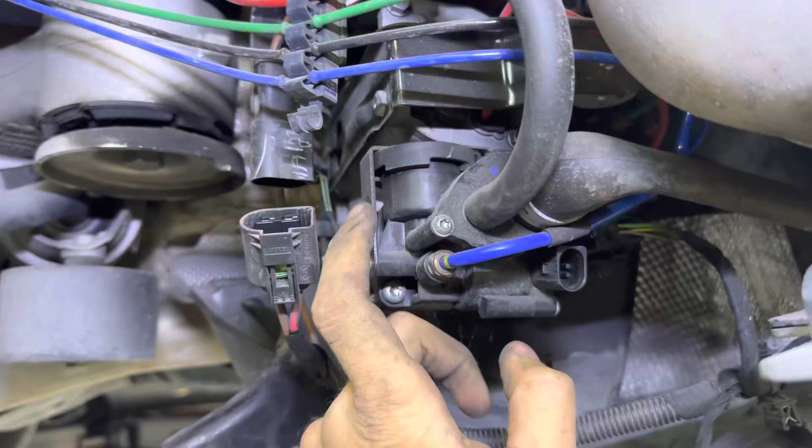The connectors, there's 1, 2 here, and then the third one is right there. And there's all your lines, by the way. Make sure you take a picture to know how they go.

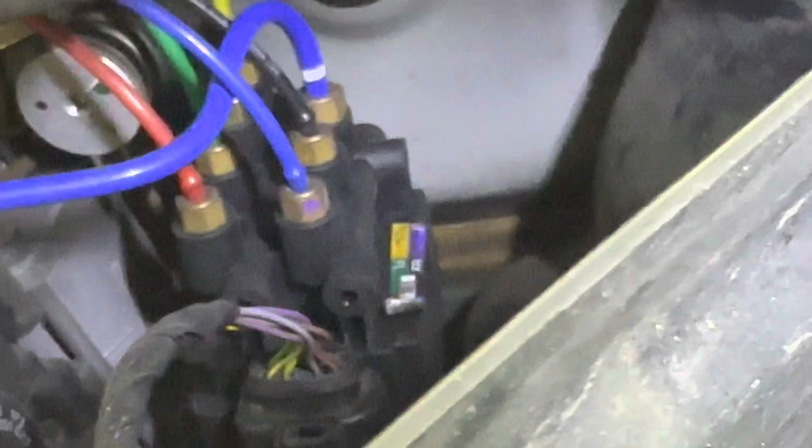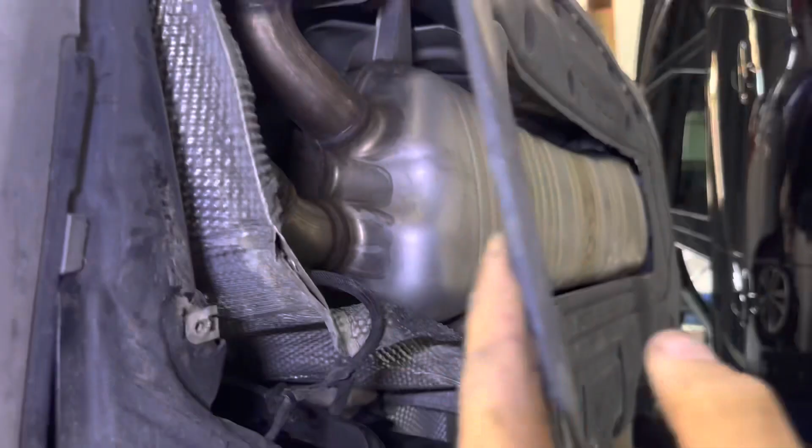Okay, so go ahead and take off the wheel first. You're gonna need a 17 millimeter, and then get a 10 millimeter and an 8 millimeter. You can take off the fasteners here. Don't worry about any of that. You're gonna remove this right here. There's gonna be a bunch of bolts. You don't have to remove this. You don't have to remove the muffler like they say in the instructions. This comes off, just loosen it.

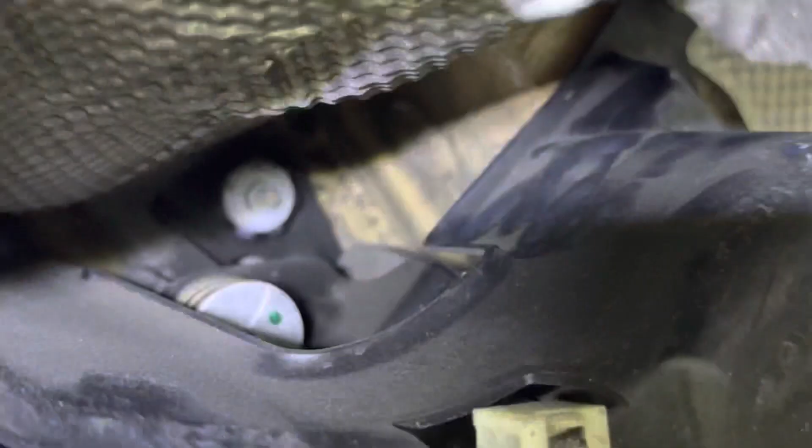And there's gonna be 1 bolt right there. And then 1 bolt right here. And 1 bolt right here. Okay, so you're gonna be able to access it like this. Just bend this out of the way to access this. There's gonna be a connector here.

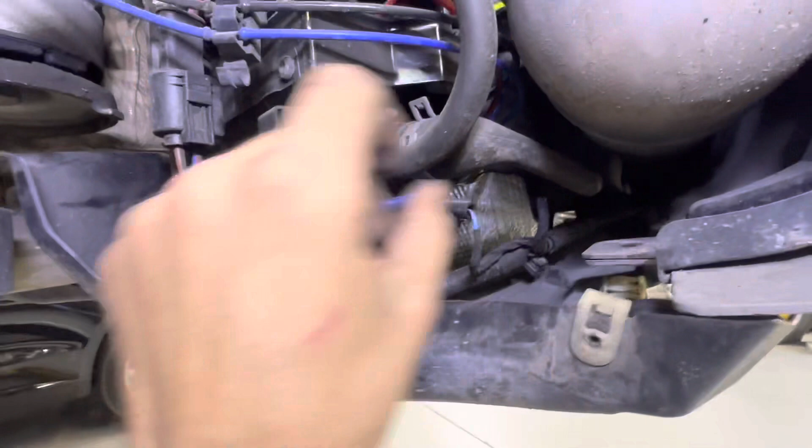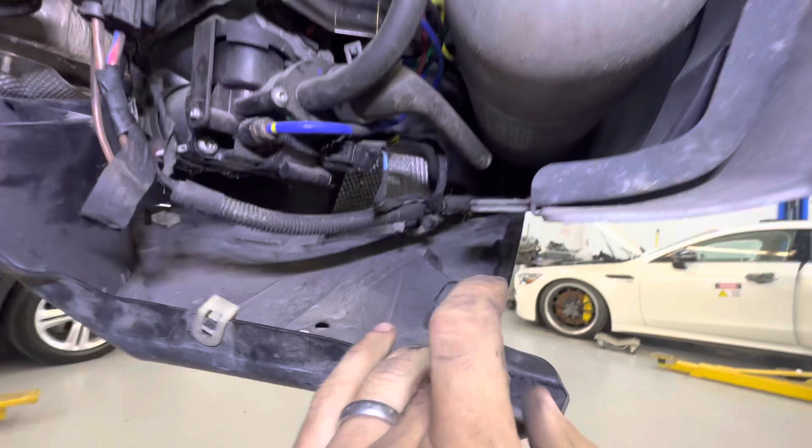Airlines, you're gonna release right there. You see at the valve block. It's all one assembly. I'll show you. Here's your air tank. There's gonna be also 1 connector right here. Make sure you take a picture so that you know where everything goes. And unclip this wiring harness right here from right there. And yeah, pretty straightforward. I'll show you in a second.

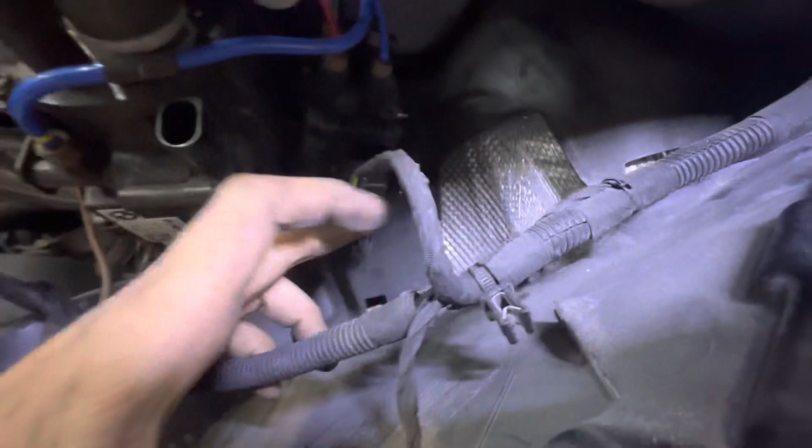There's also 1 connector there, so there's a total of 4 connectors. 1, 2, which goes there. 3, which goes there. And then 4, which goes there.

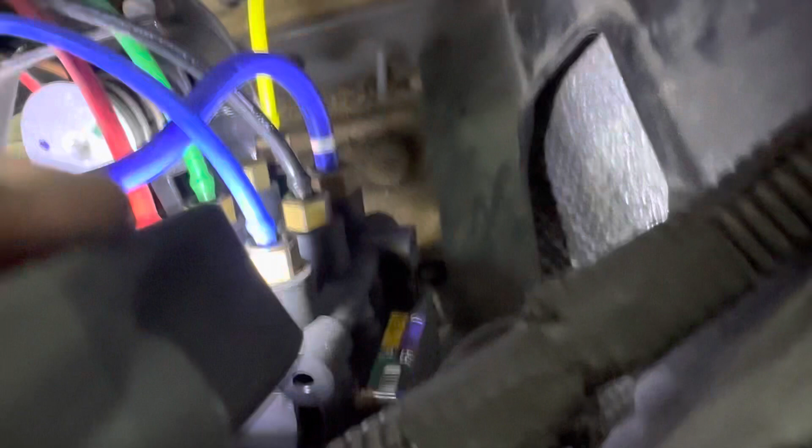So next, you're gonna remove that yellow line that goes to the compressor fitting. Remove it and let it drain. Hear that hissing? And then start slowly loosening all these as well.

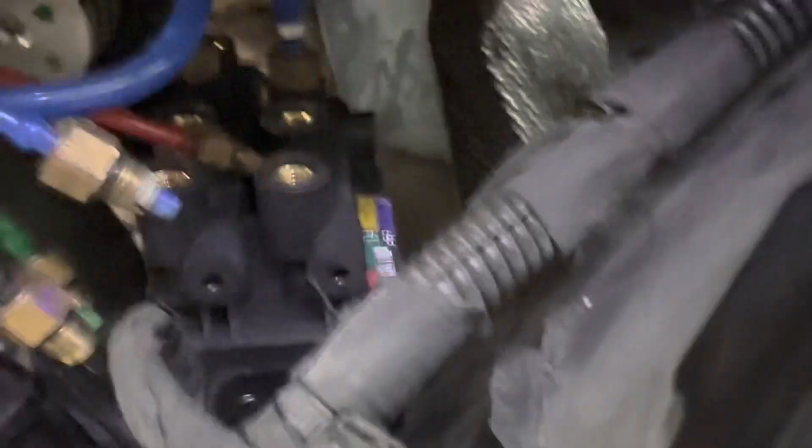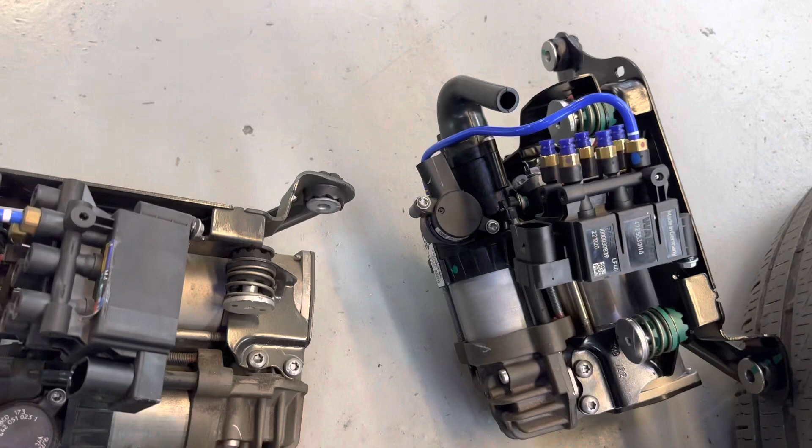So here we can see the 2 compressors side by side. As you can see, you get all new caps for the new one. Very easy, you just got to take off the old ones from the airlines. Everything comes with a new valve block. You're gonna have to reuse your bolts for these mounts.

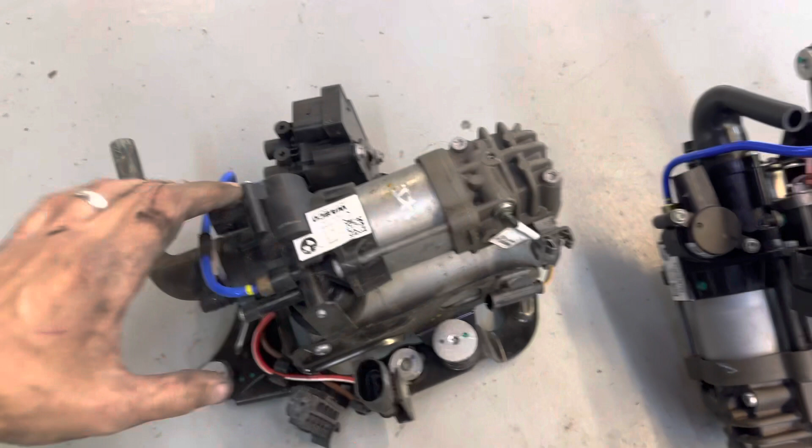This is the actual compressor unit. It's integrated filter inside. Pretty straightforward, and then I'll show you, we're gonna have to code this with ISTA after and set the correct ride height.

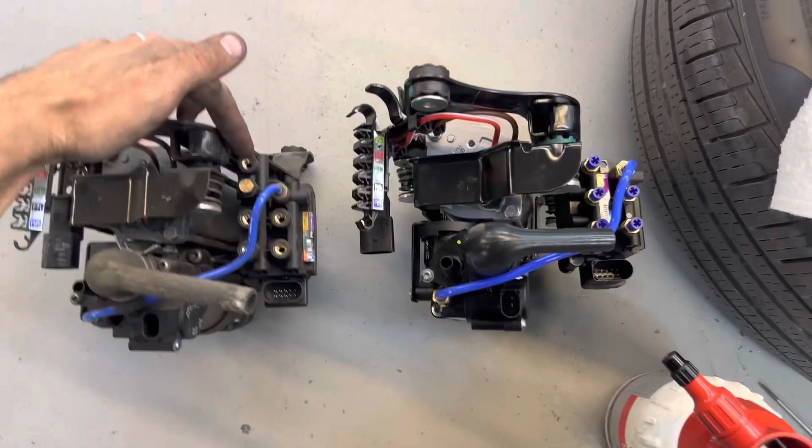As you can see, the updated part, they removed that top valve. It's gone now, this one, and they blocked off this one. I'm not sure what it's for, but on this one we only have 1, 2, 3, 4, 5. On this one we have 1, 2, 3, 4, 5, 6. So this is the updated redesigned version.

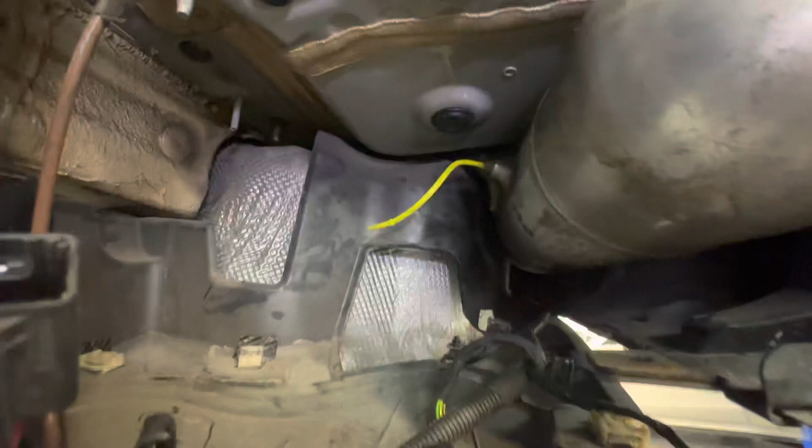What you're gonna do is clean all of your lines, the ends of them, with brake clean to make sure they're clean, and that one there. And then now you're ready to reinstall the new pump.

So here's our new compressor in. You can see that all the lines are in place. The connector is in place. That connector, you take off this little protective shield. It's gonna be in place right there. This connector is in place. That connector right there is clipped in.

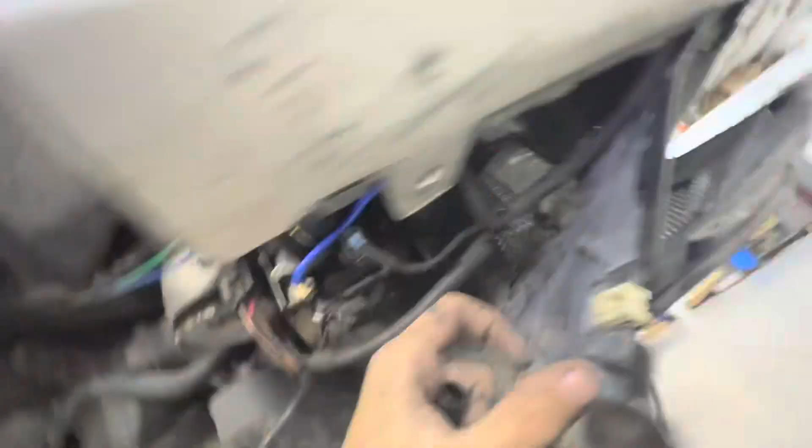All the lines are attached, as you can see. You just literally slide into place, very easy. And then just snug up the 3 bolts. You're gonna get 2 from this side and one from underneath over there. And then put everything back.

I'm gonna leave these covers off for now because I wanna check for leaks before I send this thing out. And next we're gonna do the ISTA programming.

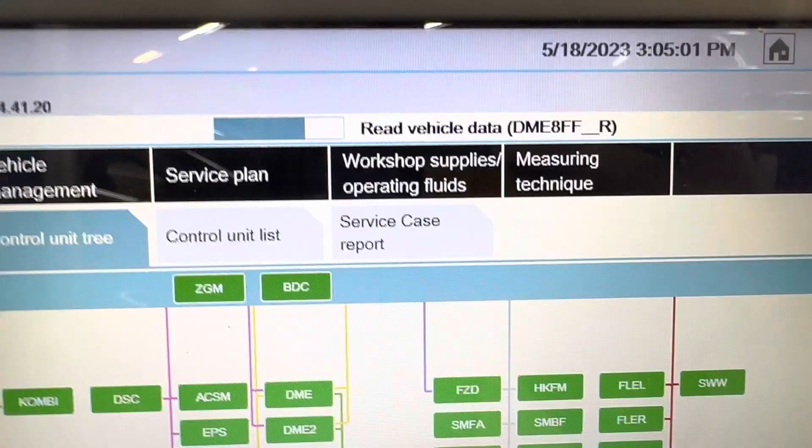So you're gonna wanna make sure that your hazard lights are on and your low beams so that the car doesn't go to sleep. And then once you open up this to do a full fault scan,